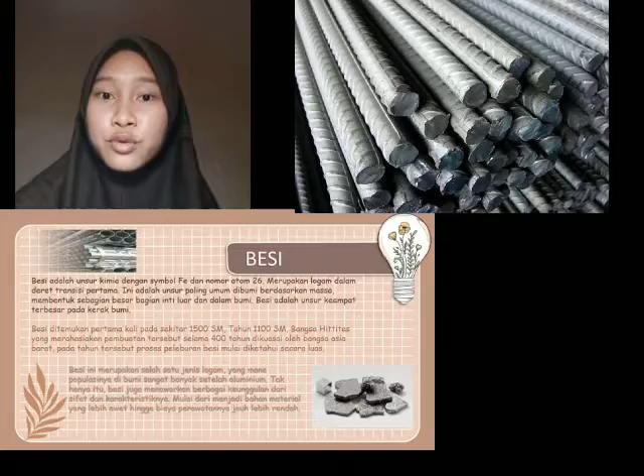Besi adalah unsur kimia dengan simbol ferum dan nomor atom 26, merupakan logam dalam deret transisi pertama. Ini adalah unsur paling umum di bumi berdasarkan massa, membentuk sebagian besar inti luar dan dalam bumi. Besi adalah unsur keempat terbesar dari kerak bumi.

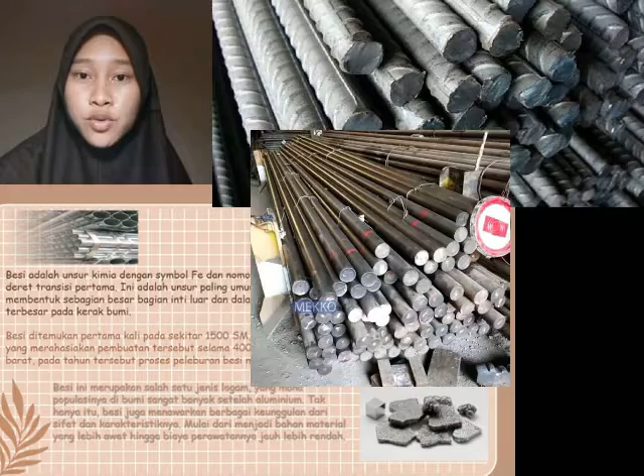Besi ditemukan pertama kali sekitar 1500 sebelum Masehi. Tahun 1100 sebelum Masehi, bangsa Hittites merahasiakan pembuatan besi selama 400 tahun di kawasan Asia Barat. Pada tahun tersebut, proses peleburan besi diketahui secara luas.

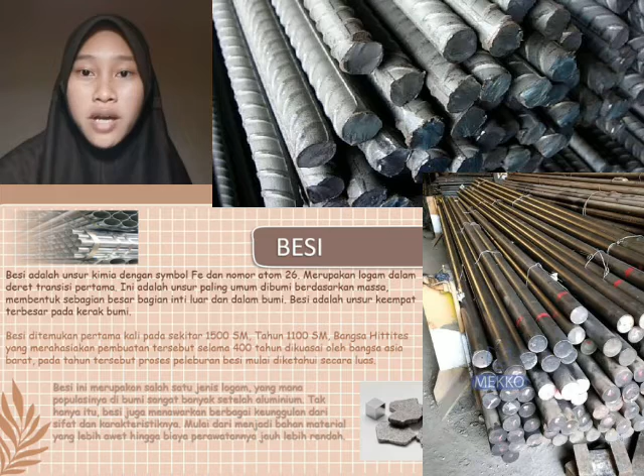Besi ini termasuk salah satu jenis logam yang populasinya di bumi sangat banyak setelah aluminium. Tak hanya itu, besi juga menawarkan berbagai sifat dan karakteristik, mulai dari menjadi bahan material yang lebih awet hingga biaya perawatannya jauh lebih rendah. Selanjutnya kita masuk ke dalam proses pembuatan besi.

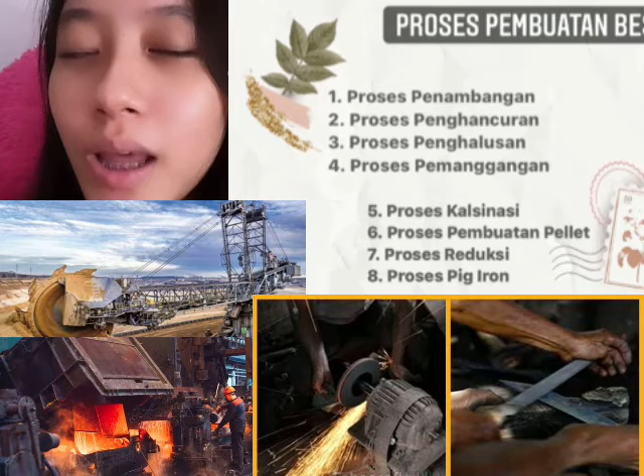Ada 8 proses pembuatan besi. Yang pertama proses penambangan, kedua proses penghancuran, ketiga proses penghalusan, keempat proses pemanggangan, kelima proses kalsinasi, keenam proses pembuatan pelet, ketujuh proses reduksi, dan yang terakhir proses pig iron. Nah, supaya lebih jelas lagi, simak video berikut ini ya.

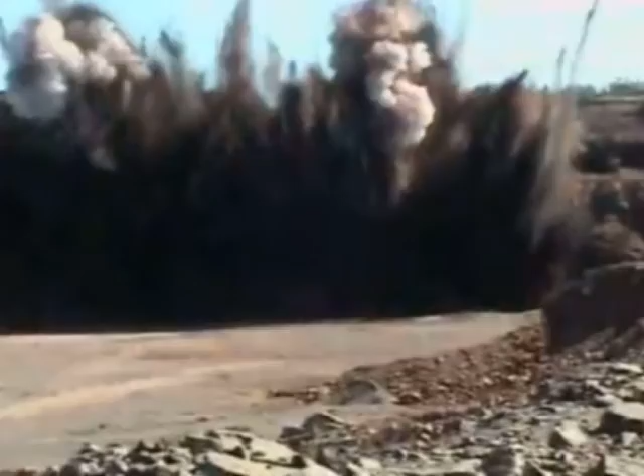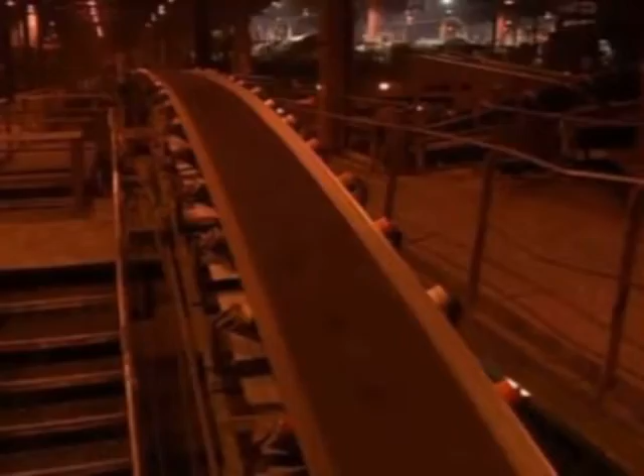As rock explodes and the raw materials of steel are tossed from the earth, the rock is taconite, and the prize inside is crude iron ore. We get at it by grinding the rock to powder and separating the ore with powerful magnets. Then we form and heat the ore into marble-sized pellets that will later be converted to iron.

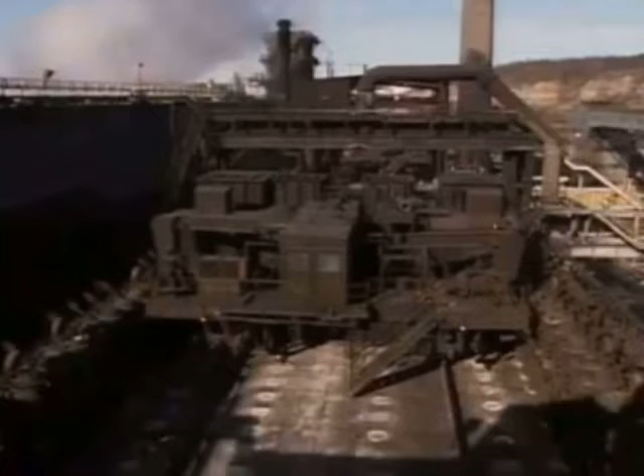From bituminous coal, we create coke to fuel the iron-making furnaces. We crush the coal, seal it in airtight ovens, bake for 12 to 16 hours, and remove it from the oven as solid carbon fuel.

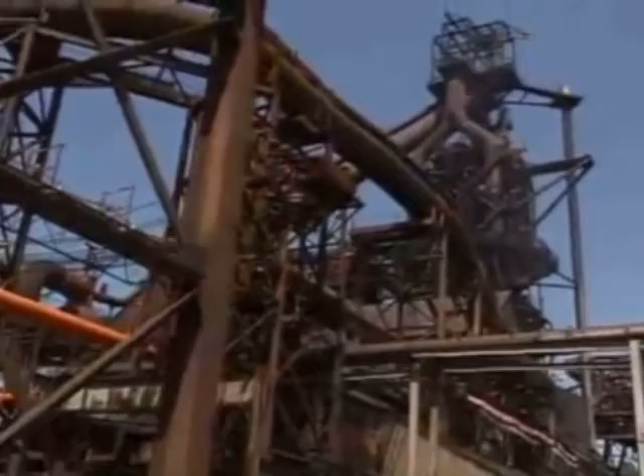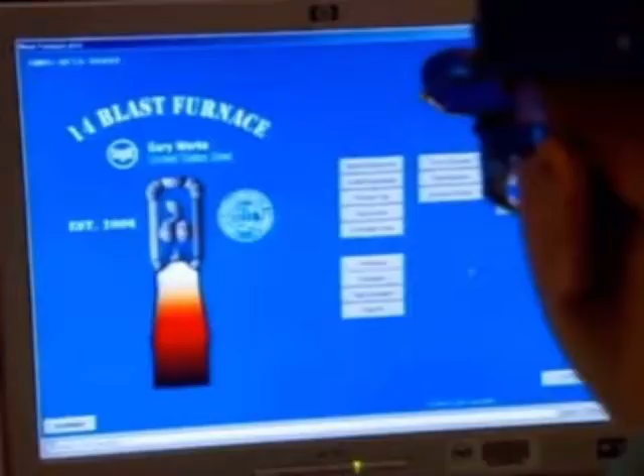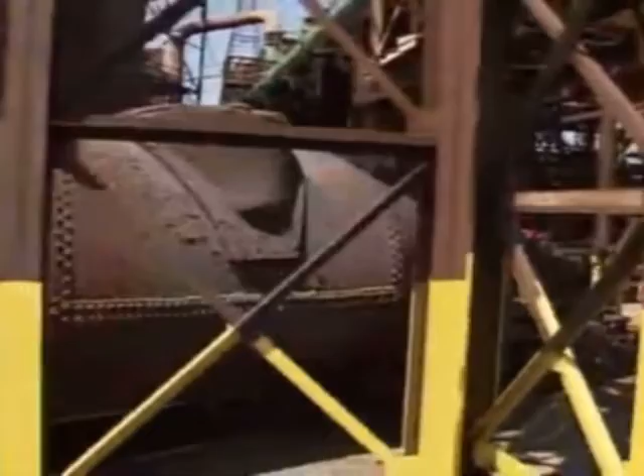The fuel and pellets come together in the blast furnace, where we add just enough limestone to remove impurities. From below, a continuous blast of superheated air combusts the coke, intensifying the heat and changing raw materials into molten iron - sometimes more than 9,000 tons of it a day in our largest blast furnace, where it reaches a temperature of 2,700 degrees Fahrenheit. At regular intervals, we tap this blistering brew into giant submarine ladles that ride on rails to the basic oxygen shop, where iron will be turned into steel.

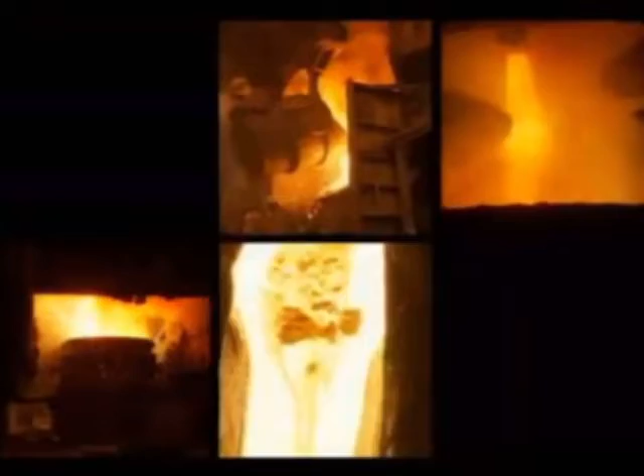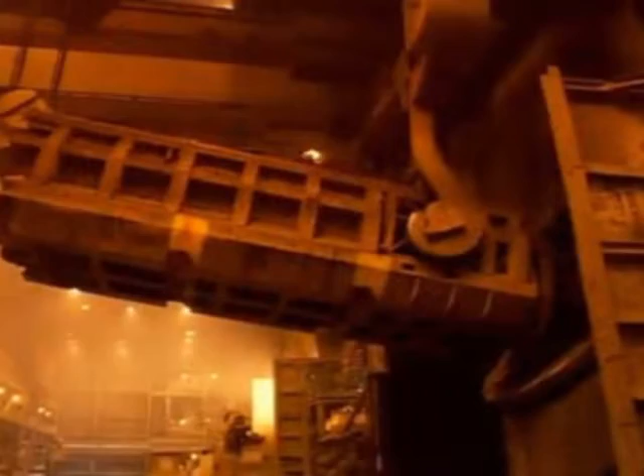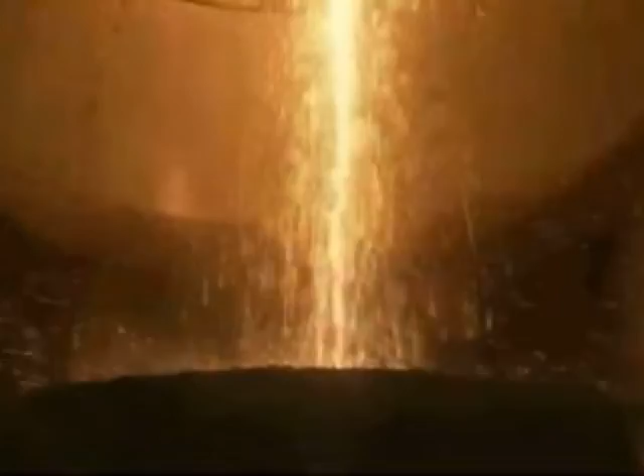In this fast-paced sequence, up to 250 tons of steel can be made to order in less than 45 minutes. We begin the steel-making process by dumping recycled steel scrap into the basic oxygen furnace and adding hot iron. Sparks steal the show when high-purity oxygen is blown into the mix at supersonic speeds and molten iron becomes molten steel. Now we're ready to create the custom blends that make steel the most widely used metal on the planet. In fact, we produce over 1,500 different chemistries to meet customer demand for cutting-edge, value-added steel.

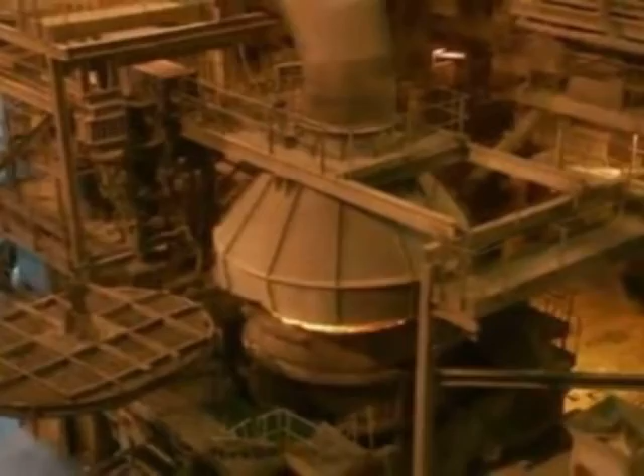Look for another show of sparks as we tap molten steel from the BOP vessel into a ladle. Then, for most of our steels, it's on to the vacuum degasser, where they are made highly formable. The focus then shifts to forming and finishing, which determine even more of the steel's characteristics.

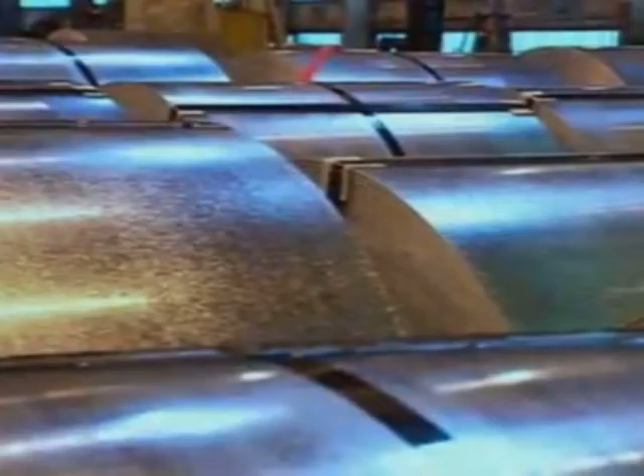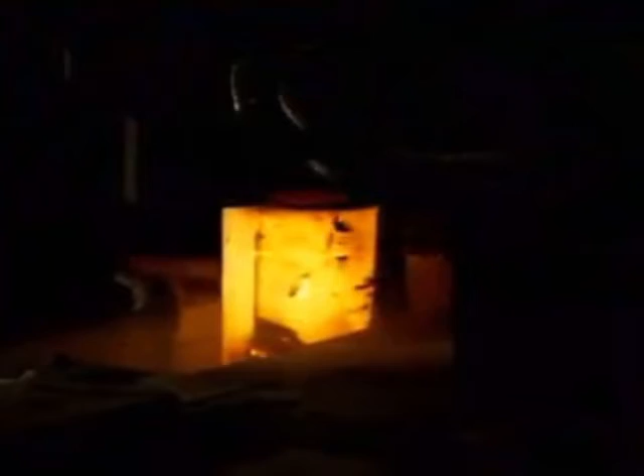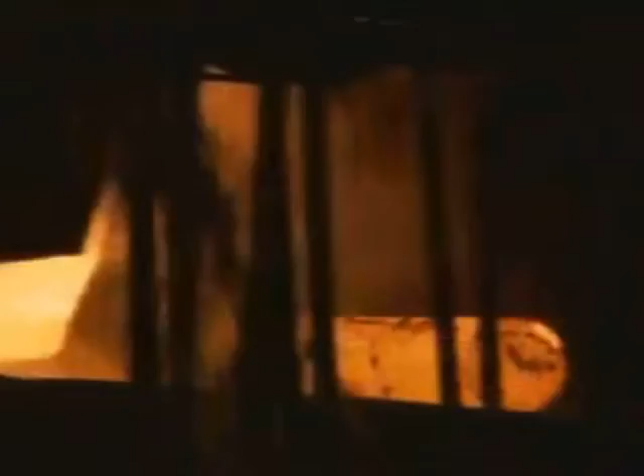The first step in this sequence is to position the ladle above a massive tundish or funnel that feeds a continuous caster containing molds that shape the steel. The molten steel, now at 3,000 degrees Fahrenheit, is channeled from ladle to tundish to caster, where it cools to a red-hot solid. The shape of the mold determines the shape of the semi-finished products that come out of the caster.

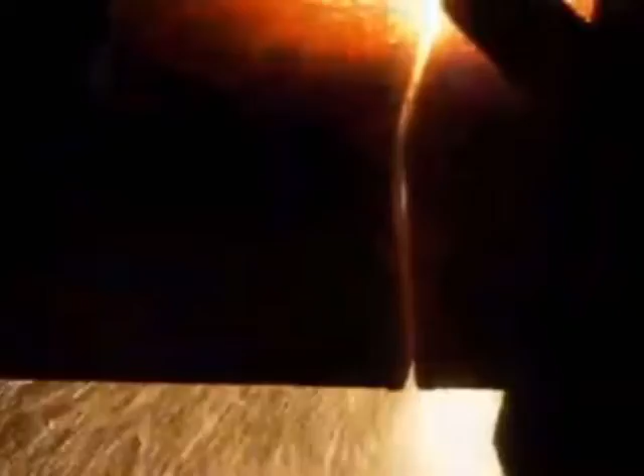And since most U.S. steel plants make sheet products, most of our casters output slabs, typically 8 to 9 inches thick and 3 to 5 feet wide. As they exit the caster, slabs are cut into sections up to 40 feet long and stacked to await further processing. Then it's on to the hot strip mill.

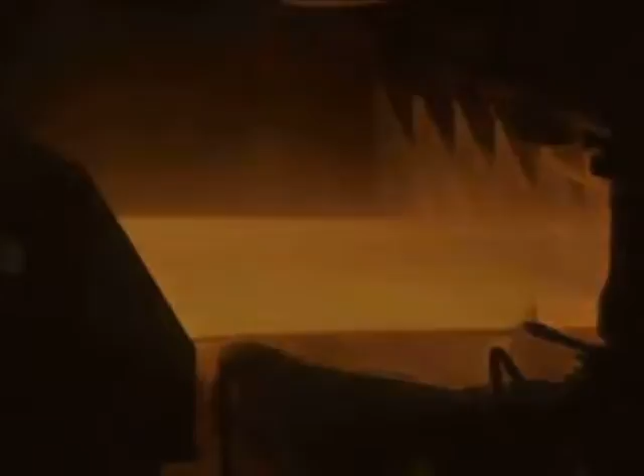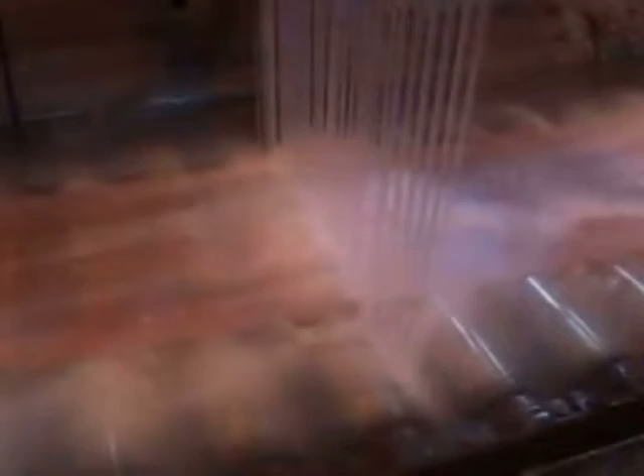This is where we begin transforming steel slab into steel sheet. Slabs are reheated to 2400 degrees Fahrenheit and descaled before running through a series of roughing stands that make them thinner and longer. Then they cycle through finishing stands where they are rolled even thinner. Finally, they are cooled and rolled into coils that may be thousands of feet long but only fractions of an inch thick - a far cry from the chunky rectangle that came out of the caster.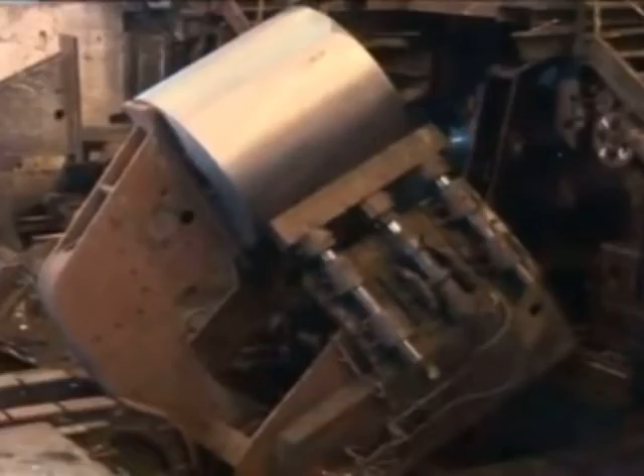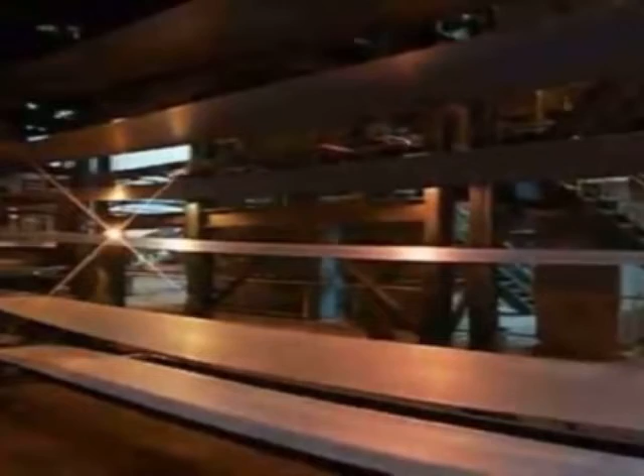And the entire process is untouched by human hands, controlled instead by operators using state-of-the-art automated equipment in pulpits that overlook the action. Next, we move to the pickle line, where coils move through an acid bath that cleans the surface. Some of the emerging coils are shipped directly to customers as hot band.

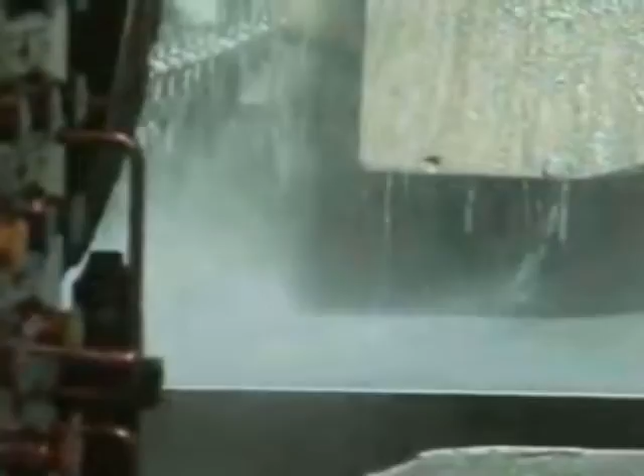Others are destined for applications that require special finishing, beginning with cold rolling to make them even thinner. At that point, coils may be shipped or go on to one or more additional finishing processes, including coating to make the steel resistant to corrosion.

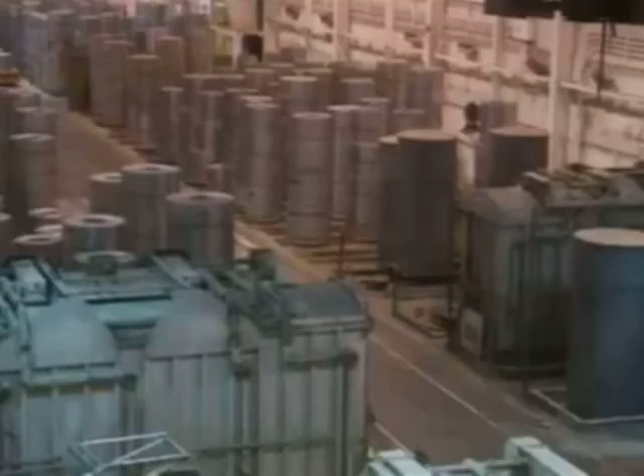Tinning to further reduce the gauge and add the tin coat we commonly see on canned goods. Annealing to make steel that is easier to bend and form. And tempering that uses special rollers to add hardness and create surface textures and other special finishes.

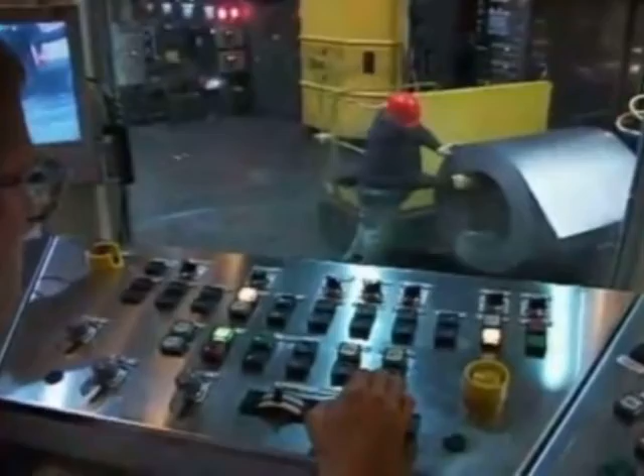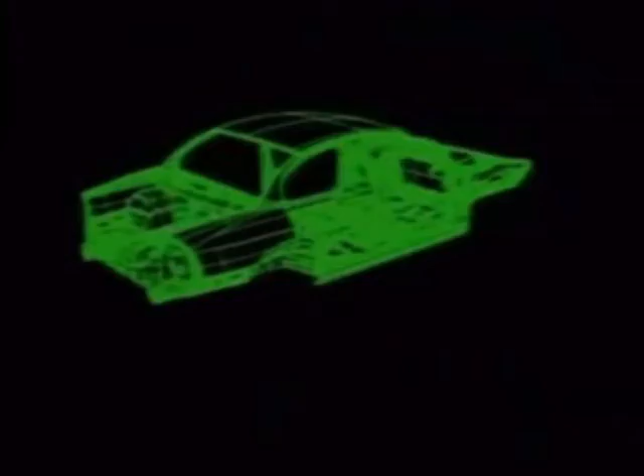In fact, many of our products leave the finishing facilities as the industry's newest superstars: lighter, stronger, highly engineered, formable steels that were unheard of just a few short years ago. No wonder the story of steelmaking stays so fresh, with innovations that guarantee something new to see in each showing, with product placements in our homes and high-rises, on our highways and in every other part of our daily lives.

And with a cast of thousands who continue to improve and perfect every step of the steel-making process, from shaped pellet to shipped coil and beyond.